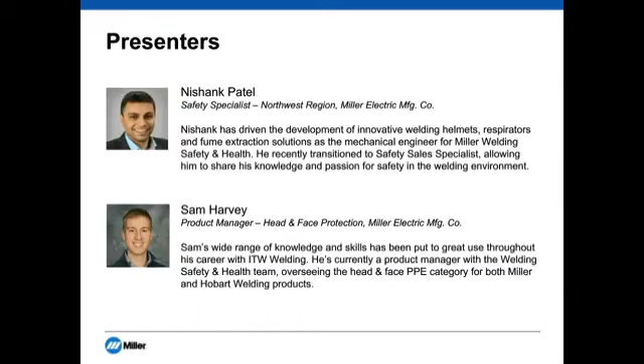Hi everybody, this is Sam Harvey from Miller. Before I get started, I'd like to read our own disclaimer as well. As every welding environment is different and needs to be evaluated by a qualified industrial hygienist to determine the appropriate course of action for fume controls, this presentation is intended for awareness and introductory purposes only and should not be used to replace professional consultation. And then as this group of professionals knows, perhaps more than any other group of professionals, you should read the manuals prior to operating welding equipment in order to fully understand the risk of welding.

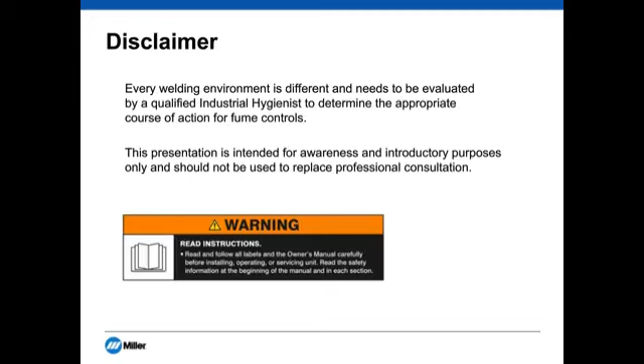With that out of the way, the title of today's presentation is Insight from the Inside. Our goal here is to give you feedback that we've heard from customers that we've visited. As a company, Miller Electric visits quite a few large end users, and what we're trying to do here is give you some of the items that we've learned. Of course we've done third-party research, however, I want to stress that this presentation is not a scientifically researched PowerPoint. It's not based on sample sizes or statistical analysis. We are simply sharing voice of the customer research that we've done, with the hope being that you can use some of the takeaways that we provide in order to enhance your facility, in order to just learn for general knowledge.

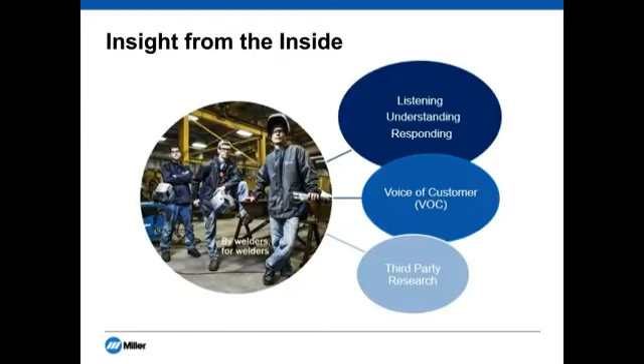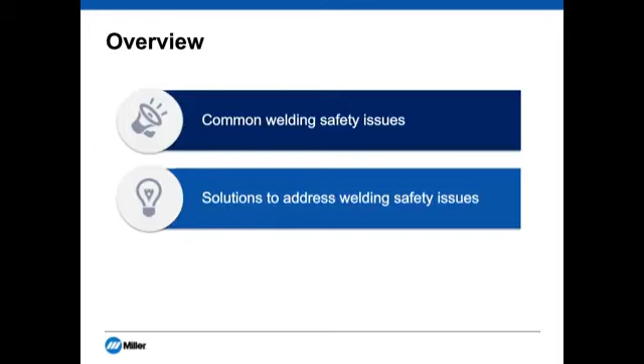So what we're going to go over: we'll start with going over common welding safety issues we've seen and heard, both from safety managers as well as from welding operators. We'll then touch on some of the solutions to address those welding safety issues. Again, in terms of two different things, we'll talk both about tools that you could potentially implement as well as any behavioral changes that we would recommend. Then lastly, we'll leave you with some best practice ideas in order to increase operator acceptance and compliance. Really, these are things that, in order to put those tools or behavioral changes into action, we think give you the best chance of success.

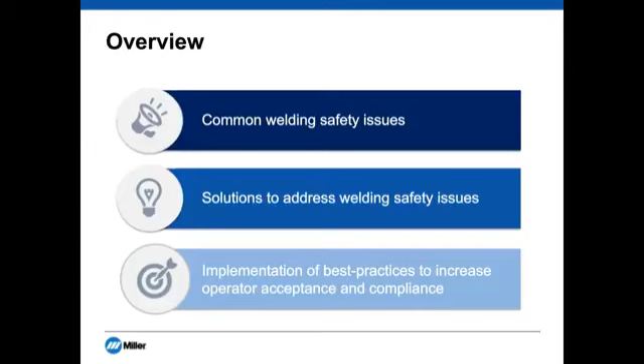So we'll start out with common welding safety issues that are seen by companies like yourself or companies in the welding industry. And when talking about welding safety, it makes sense to start with eye protection. Studies have shown that eye injuries account for roughly 25% of all injury claims by welders, and that 90% of eye injuries could be avoided with proper PPE use. The three eye injuries that we're going to touch on today are welder's flash, debris entering the eye during or after the shift, and then eye strain.

So the main causes that we see from eye injuries are improper helmet settings and use, limited visibility and vision impairments, and then misuse of safety glasses.

In terms of improper helmet settings, really that's about not keeping the helmet down. If you're welding in tight spaces, maybe you don't have the proper lens shade. That's kind of what we're talking about. We'll go into solutions in the later part of the PowerPoint.

From a limited visibility standpoint, we're talking about either using a low quality lens that makes it harder to see the weld, not cleaning your cover lens, not adequate lighting, for example, and then misuse of safety glasses. That one's pretty basic, but it's a big one that goes into debris entering the eye, so we'll touch on some things you can do there.

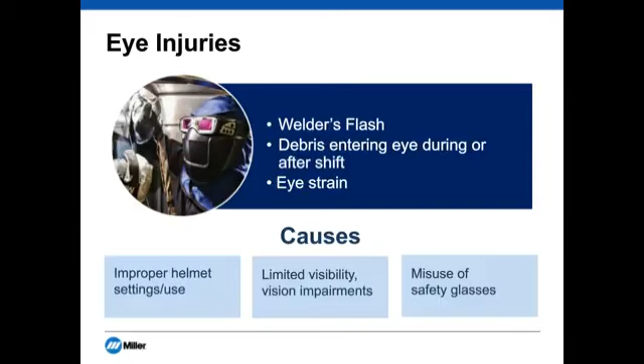Moving off of eyes, another common injury we see has to do with neck strain. This is something we hear a lot about from operators. Maybe it hasn't turned into an OSHA recordable injury, but in terms of ensuring compliance of wearing PPE, obviously comfort plays a really big role in that.

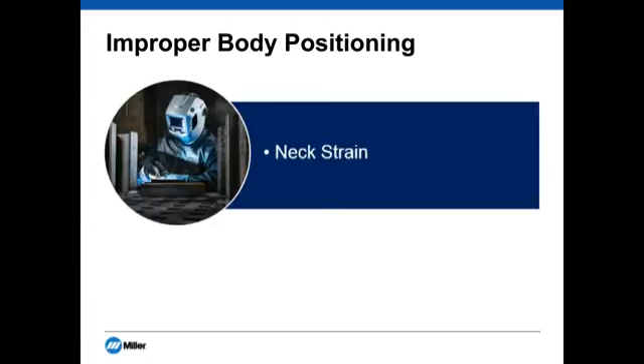Specifically, the causes we see are frequent nodding of welding helmets, limited adoption of welding lens technologies, bulky, oversized welding helmets, and then poor posture and no stretching regimen. We'll break down all these in terms of how to attack those.

So now I'm going to hand it over to Nishank. He's going to introduce some of the issues we see from a fume exposure standpoint.

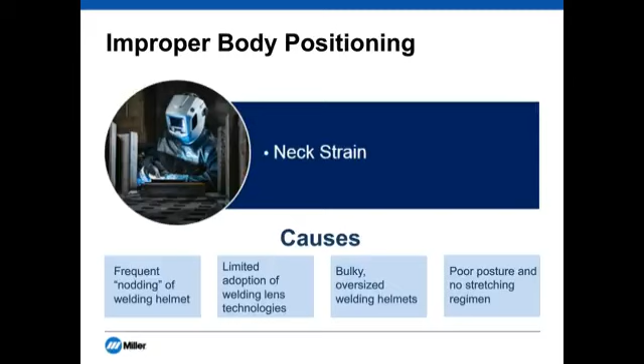So with fume exposure, there's really three things we tend to see a lot of. A lot of customers will find that they have excess fume generation. They'll find that their fume extraction arms are not capturing enough fume. And then they might also be misusing their respiratory protection even though they have some in place.

And there's really three things that cause this. The first one is that welders are using improper weld settings and they're not trained properly. If you don't have the right welding parameters, you could have lots of spatter and fume generation. So that's one of the big things we see, that people are not trained properly, they are not using the right settings.

Next, operators are not adjusting their extraction arms. With fume extraction arms, usually the normal capture distance is roughly 1.5 times the width of the opening of your hood. So it's a pretty narrow window, and let's say you're working on a long weldment, and all of a sudden you're further away from your extraction hood. You really need to keep moving that arm to make sure it's positioned properly so it can capture the fume. Welders sometimes might be lazy and not do that. So that's one thing to keep an eye on.

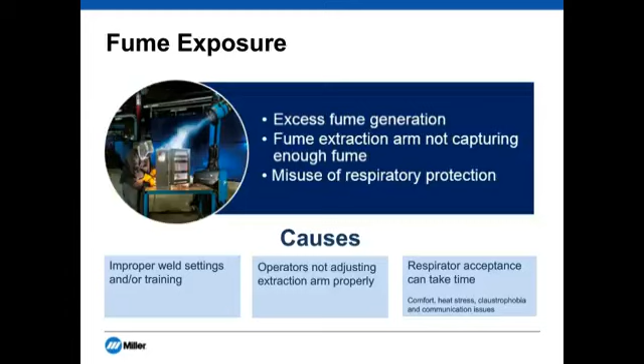So next, I want to cover hand injuries. The most common thing we see with hand injuries are hot wire pokes. And again, there are three things that we tend to see that are causing them.

Number one is improper welding glove selection. Basically, depending on what you're doing, whether it's stick, MIG, or TIG, you always have a trade-off between having the dexterity in the glove and the padding in the glove. So you want to make sure, let's say you're doing stick welding, for example, and especially at higher amperage, you want to move to a heavier duty glove. So that's the first thing we see.

Then we also see, when you're doing really small welds, so you're tack welding or moving really quickly, that's where welders are not paying attention. That's another place where we tend to see a lot of these injuries. And then finally, it's just the torch angle and position and having that set properly. That can make a big difference. So those are three things we see with hand injuries.

And now I'm going to turn it back to Sam to talk about solutions and what we can do to avoid all these injuries we just mentioned.

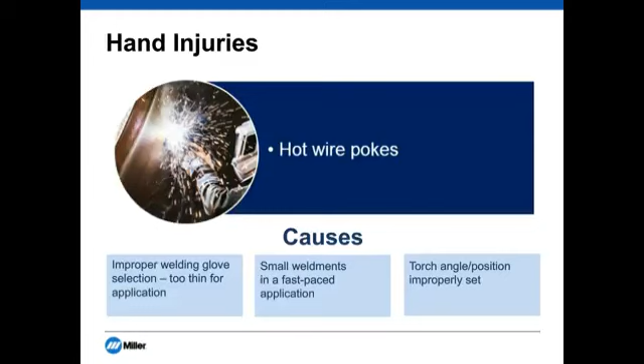So heading into solutions, we'll head back to eye injuries and start with welder's flash. As a lot of you might know, welder's flash occurs when harmful ultraviolet rays are absorbed by the cornea. It can be very painful. It's not usually permanent, but it can be, and mostly it leads to eye swelling and tearing.

From our standpoint, the best way to prevent welder's flash is to keep the hood down. Even if an auto-darkening lens doesn't darken for some reason, the welder is still 100% protected from ultraviolet and infrared rays, so welder's flash does not occur with the hood down.

There's a lot of different ways to try and increase the percentage of time that your welders keep their hoods down. The ones we see the most are comfort. I talked about that earlier in terms of how important it is to purchase products that are comfortable. We see this as a win-win for operators and safety managers in the sense that it's easier to drive adoption, and of course it leads to more compliance.

Another thing we look at in terms of keeping the hood down would be newer lenses on the market that provide greater clarity while welding. Obviously it's important to have increased contrast when you're welding, but in terms of reducing welder's flash, having a lighter light state makes it so you can keep your hood down even when you're not welding.

Outside of keeping the hood down, there's providing tools for unique applications. We've heard too many times of people trying to weld in tight spaces who need to quickly take their hood off and cover their eyes with their arms, or use some other method that isn't compliant, but really it's because they can't fit their helmet in—either welding underneath a chassis or trying to get into a tight confined space. There are now auto darkening tools available so people can weld in tight spaces that fit very close to the face, so we don't really see a reason for not equipping welders with those tools.

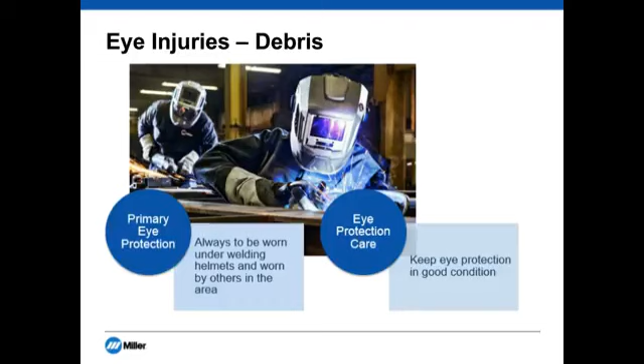So from a strain standpoint, I guess we'll start with the basics again—providing cheater lenses and replacing dirty lenses. Magnifying lenses, or cheater lenses, are available in pretty much all welding helmets—you just buy a little piece of plastic that you can slide in front of the inside cover lens.

Especially for the older generation, those are pretty useful. To reduce the strain of needing to get really close to the weld or trying to focus more than you need to, definitely provide cheater lenses. They're very inexpensive.

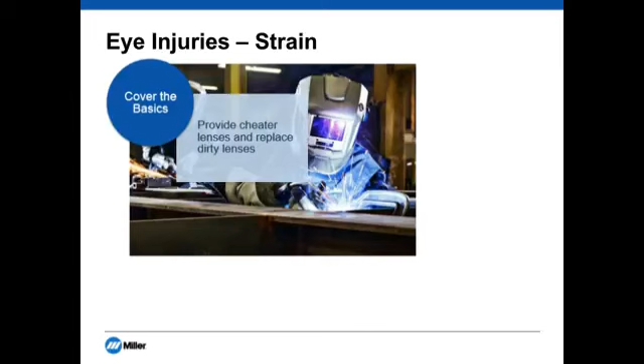Secondly, make sure your welders are selecting the proper lens shade. This is pretty basic, but there are a lot of new welders entering the industry. What Miller recommends is to start at the darkest shade and work your way down until you're able to see the weld puddle comfortably. So don't start at shade 8 or 9, for example—start at shade 13 and then select the right shade so you can see it. You're not overly straining, but your eyes are protected and it's comfortable.

Next, improve clarity. I touched on this a bit, but in terms of buying the latest and greatest, there are quite a few advanced lenses out there that try to make it easier to see the weld puddle. With increased contrast when welding and a lighter light state when not welding, it just makes it easier to see, which leads to reduced eye strain.

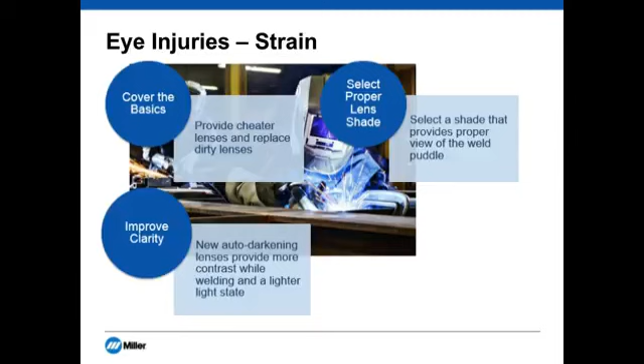And then lastly, staying protected at all times. There are many options out there with integrated grind shields, which allow welders to keep protection on when they're not welding—as opposed to lifting up the full welding helmet and only having safety glasses on underneath. You raise up your auto darkening lens or passive lens, and you have an integrated grind shield underneath, which is a big productivity enhancement but also a great safety tool, because you're fully covered the entire time and can move on to whatever other task, whether grinding or prepping. You're fully protected, and your eye isn't straining through a shade 3 or shade 4 light state.

In terms of improper body positioning and neck straining, the next thing to look at is eliminating nodding. This is again kind of basic, but there's definitely still a lot of passive helmets out in the market, and they certainly play their role. But auto darkening helmets are becoming pretty inexpensive and very reliable, and they really do reduce the need of nodding.

Of course, if you're using a passive lens, you keep your hood up until you're all set up and ready to start welding, then with a jerk of the neck you lower down the helmet. Over time, this can cause neck issues. When you hear of welder's neck, typically it comes from that nodding. So transitioning to an auto darkening hood is, I'd say, a very inexpensive investment to make in a person's long-term health.

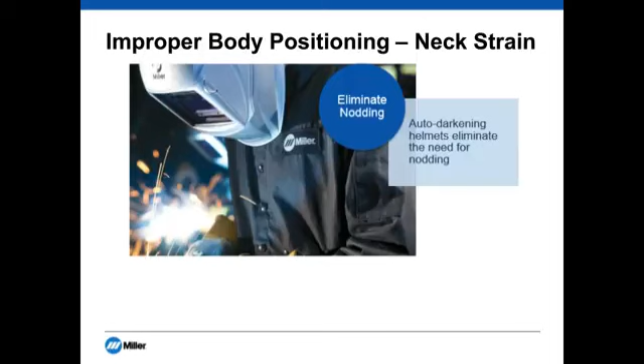Helmet selection—things to think about when choosing a helmet to reduce neck strain. Helmets certainly should be light; people always think about that. The other thing we talk about is balance. There are really two variables that go into neck pain when selecting a helmet: weight and balance. You can think about balance as, do you want more weight hanging off the front of your face, or would you rather have it on top of your head? Those are very drastic examples, but it gives you an idea from a neck pain and torque standpoint—on the back of your neck, it's reduced when the weight of the helmet is shifted towards the back. So looking at both weight and balance is a key component towards neck strain over the long term.

And it's amplified when using hard hats. You have to fit the hard hat underneath your shield, so the weight of the welding helmet is pitched up and pitched forward, making that torque equation even more important. We do see more neck issues when it comes to hard hats combined with welding helmets.

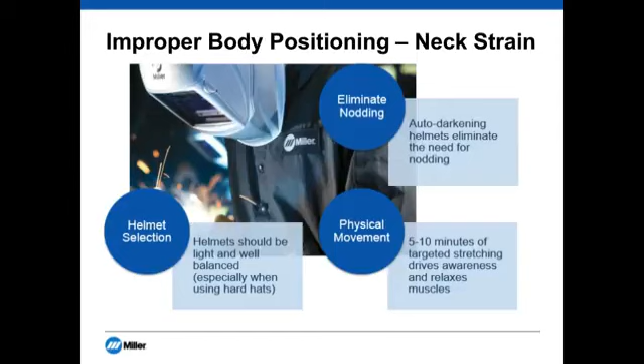Lastly, physical movement. A lot of times you have to do out-of-position welding, or even if not, you might be staying in a good posture position. However, you're in a pretty consistent position throughout the day, and that puts a lot of strain on muscles over time. So a basic thing a company can do is implement a 5 to 10 minute stretching program, whether that's at the beginning of the shift. At Miller, we do it during a break in the middle of the day. It could be both, depending on if you're doing a lot of out-of-position welding or anything that really strains the neck muscle. Those things can go a long way towards building those muscles and releasing some of the strain.

Another thing to think about would be job rotation. That's something we try to do at Miller Electric when it comes to assembly. It's something other companies should be implementing as well when possible. If you have certain welds at one position potentially straining certain muscles, and you rotate that person after a couple of hours to a different piece of work at a different position using different muscles, it really helps reduce fatigue overall.

And then lastly—oh sorry, yes, the last one would have to do with work hardening programs. Thinking about new employees entering the workforce, it's well documented that welding has an older workforce, and there's going to be quite the influx of young people. A lot of times we see people getting injured in the first year or two on the job, and it's not hard to imagine why. If they're not used to standing for 8, 10, or 12 hours a day, they're probably not used to being in a certain position. So when it comes to back, neck, and different types of strains, work hardening programs—while not necessarily easy to implement because of the culture, or people who've been there a long time wondering why new people are working less—can pay dividends in reducing the amount of issues new employees have when they start a job.

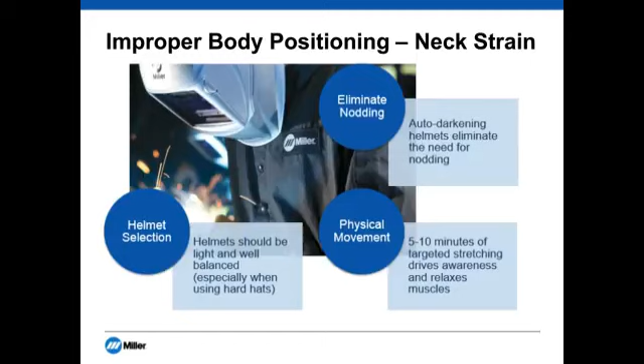The first question is: which of the below scenarios do you or your business struggle with when welding? Choose all that apply. You can see the 7 different responses there—I'll read through them quick, feel free to respond while I'm reading. We'll give about a minute. The first has to do with fogging or condensation in the helmet. The next is welding in tight spaces. The third is collecting welder productivity data. The fourth is welder training or onboarding. Fifth is not enough ambient lighting in the work cell. The 6th is fume management. And maybe you are awesome—probably you are, but even if so, you might have some of these struggles. The last option is if you don't have any of the struggles listed. Please choose all that apply, and I'll give another 20 or 30 seconds before moving on to the results.

Okay, hopefully that gave everybody enough time.

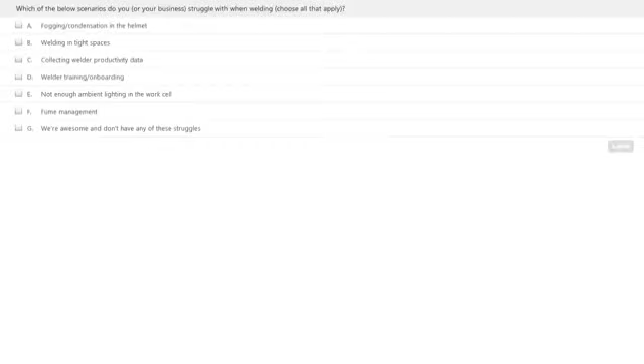So fume management is the winner, along with welder training and onboarding. Welding in tight spaces follows close behind. It's worth noting that 8.7% of you are awesome and don't have any of these struggles. I put one of those for myself too, just to make sure it wasn't left all alone, but I don't think I was the only one. Congratulations to those who chose item G, and for the rest of you, we appreciate that feedback.

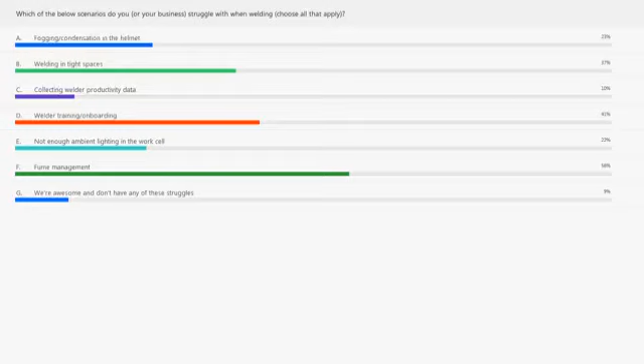Thank you, Sam. So the number one thing you can do with fume exposure and how you can combat that is proper training, right? And with proper training, what does that mean?

Really, it means that there's really three things that you can focus on. You really have to take a look at your process and the parameters you're using.

For example, let's say you're doing stick welding. Stick welding is always going to generate more fume than a cleaner process such as MIG welding, and MIG welding is always going to generate more fume than TIG welding. Again, I said always, but generally that's what we tend to see. So depending on what process you're using, if you can change to a cleaner process, that's definitely something you can do to help reduce the amount of fume you're generating.

Another thing is the transfer type. So when you're welding, whether using short circuit or spray, there's technology out there called pulse welding. What pulse welding does is dial in the exact amount, basically giving you the right amount of heat you need, so you don't produce excess spatter or fume. If you address the welding process itself, you can really dial down on the amount of fume and spatter used.

So there's a lot of power sources out there, a lot of different kinds of wires, different alloys that they're made with. Take a look at that and make sure that if you can switch, if that's something you're able to do, that will definitely make a huge difference in changing the amount of fume you generate.

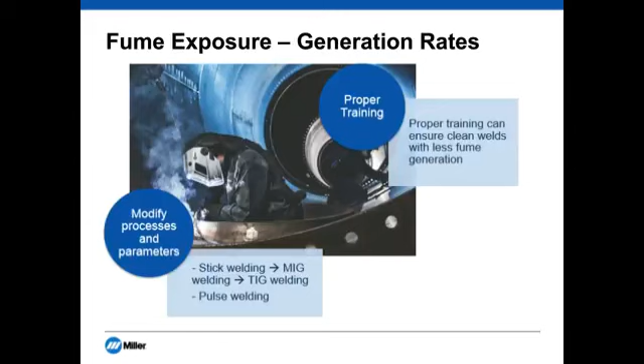Besides training and modifying the process, it's also the materials you're welding on. A lot of environments are very dirty, with a lot of dirt and grinding involved. So it's very important to clean your workpiece and make sure your base materials are clean.

The wires you're using, there are a lot of wires out there that are low fume wires, and not only low fume, but certain alloys, for example manganese, beryllium, hexavalent chromium - these are all chemicals that are hazardous. So there are wires with low concentration of those hazardous substances that you can use. You can also add more argon shielding gas to add stability to your weld. So those are some things you can do to really target the fume generation itself to reduce your exposure.

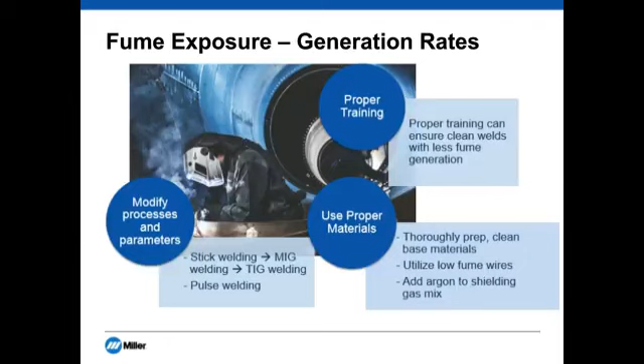Next, we'll take a look at the arm. As I mentioned earlier, there are extraction arms out there, but they only capture 1.5 times the diameter of the hood. So most of us, imagine if you were working on a long weld, it'd be pretty easy to forget to move that arm. I would be struggling every time I had to go somewhere - I'd have to always move the arm with me. That would be a very repetitive and painful process.

So you can make sure that you train your welders to always position the hood an appropriate distance from the weld, and make sure - I know this sounds silly - that the hood is facing your weld, and that it's actually pulling the fumes away from the welder. A lot of times you'll see all kinds of issues with that. So it sounds really simple, but that's what it is - making sure you train your welders to move that arm.

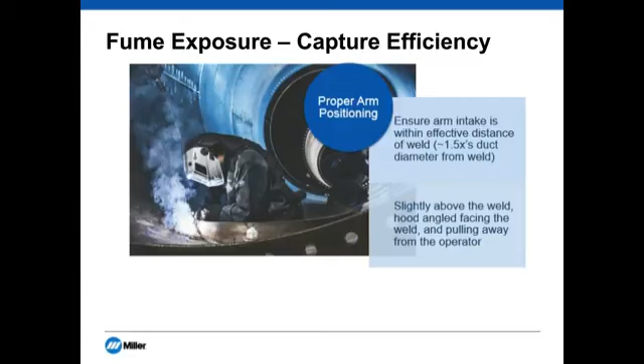There are also solutions out there that we call advanced airflow solutions. Miller has a technology called the Capture 5 system, and instead of the standard 1.5 diameter, which translates to about 12 to 18 inches of capture distance, you can get up to 5 feet of capture distance. So if you think about the problem where welders aren't moving the arm or putting it in the right position, well, if you increase the capture distance, you don't have to constantly adjust your extraction arm. So keep an eye out for technologies like that, and if you can implement something like that in your facility, it makes it a lot easier on your welders and helps with productivity.

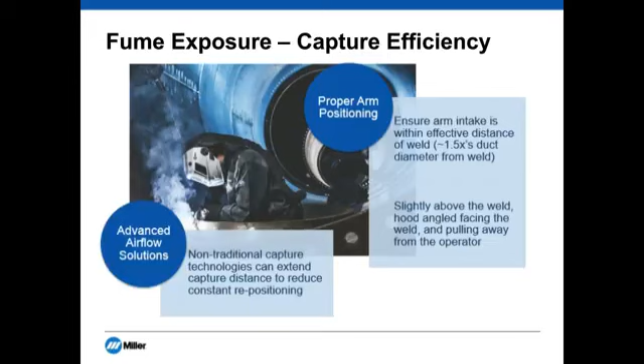The final thing I want to cover on fume exposure is respirator misuse, and we see a lot of this out there. People don't like something about their respirator and they'll modify it, or use parts from one manufacturer with another manufacturer, and that's a big issue because these systems are all tested as a system. Anytime you modify them, you could be reducing your protection, because they're not intended to be used in that configuration. So always try to use your safety equipment or respirators in the original configuration, or if there's an approved accessory or configuration, only then can you use it.

The other thing we see with respirators is making sure you're using the right respirator. There's different hazards and different exposure ranges. For example, if you're dealing with vapors, gases versus fume particles, make sure you have the correct type of filter that is rated appropriately for your hazard. And depending on your exposure level, there are different levels of protection that different respirators provide.

For example, you can start all the way on the bottom with a disposable dust respirator. You can move up, and then you can go all the way up to PAPR or supplied air systems, and all of these solutions will have an assigned protection factor. You need to make sure that the assigned protection factor you're using matches up with your exposure levels.

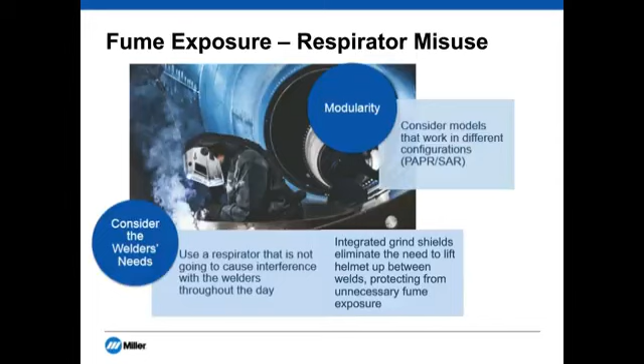It takes time, especially with these respirators. So try to do things like, if your welders constantly had to switch between a grinding helmet and a welding helmet, there are integrated grind-weld helmets out there that can really take away the discomfort, all the monotony of constantly doing different things that interrupt your productivity. That can really increase that welder acceptance rate, because if your welder's not happy with it, he's not going to be using it, or the chances are he might not be using it properly. So I hope that covers a little bit about the respirator.

Before we move forward into talking about hand injuries, I want to do a quick poll question, and I think this is the last one. The question is, which of the below reasons lead your operators to not using their respirators correctly? Option 1 is obviously discomfort. Option 2, welders don't feel the respirators are needed. Option 3 is interference with productivity. Option D is they do not work well with your other PPE - for example, you could be wearing a helmet with earplugs, safety glasses, things like that. E, if you've got amazing welders and you have no issues, then none of the above. And F, if you don't use respirators, then you choose that solution. I'll give you guys a minute to answer, and then we'll take a look at the poll results.

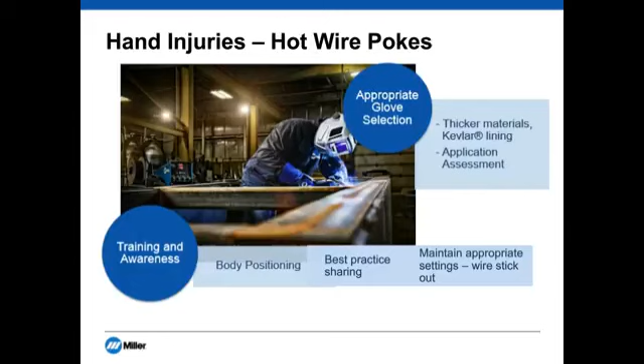So what I want to do now is turn it back over to Sam to talk about how we implement these solutions.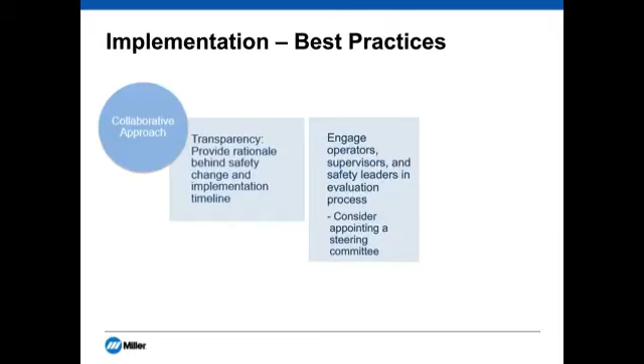It's a pretty small chance that you're going to get a change 100% right away. So have channels that are open so that people can give feedback, and then most importantly, either act on the feedback you get in terms of what's not going well, or at the very least give a response: this is why we're going to continue down the path we've taken, or this is why we're not going to make that investment. Don't just leave those comments in the shop floor box unanswered. Otherwise, that's how you lose the empowerment. In order to have that empowerment and adoption, it's really important to give feedback to people once they try and give you theirs.

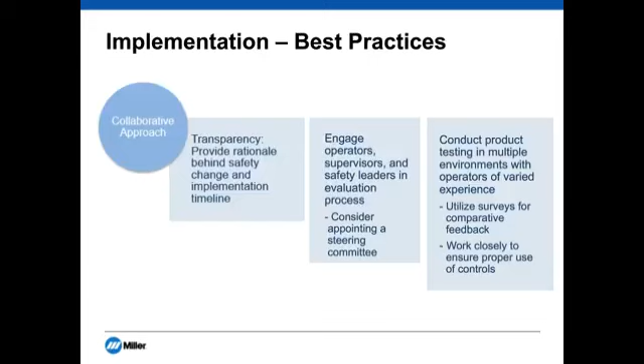So the first one I just went over was being collaborative. Secondarily, think about productivity implications. Whenever you're making a change on the shop floor or wherever you are, you're doing something different. It's going to take a little bit of time. There might be a learning curve. Again, from an operator acceptance standpoint, it might not be there right away.

One thing I'd say based on our experience: to increase the chance of operator acceptance, try to have it not impact productivity, but that doesn't always work. So that's another thing to be upfront about. If you expect productivity to go down a little bit as people get used to something, be encouraging about it. Perhaps you need to get with your operations team to make changes, whether from an overtime standpoint or a staffing standpoint.

You want to be supportive and give yourself the best chance. If people see that their productivity is being impacted because you told them to do this new thing, and now they're not able to do their job as quickly as they're used to, they're going to become cynical pretty quickly. So if you expect productivity to be impacted negatively, be prepared to counteract that. Hopefully when you're doing some of these investments or changes, productivity might be positively impacted, in which case that'll help drive operator acceptance.

That's something that you should help celebrate to reinforce the changes. So next, be patient and confident that long-term results will come even if there's a learning curve. Potentially if the scope is large in terms of the change, you might need to adjust production for a short period of time, or otherwise change your operations so that you're more successful.

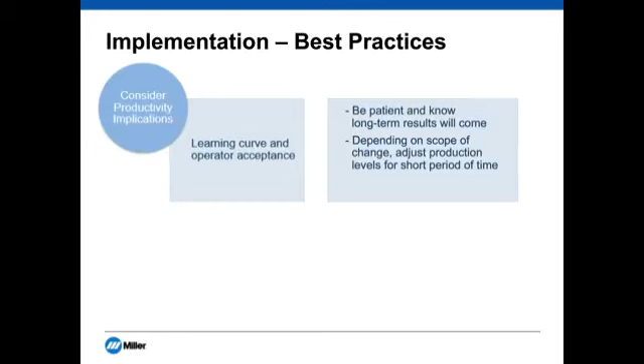So consult with like companies. Doing stuff like this is really good, of course, because you're learning from other companies. But perhaps more specifically in your field, if somebody's good at safety, I hope that they're willing to share. This isn't quite like a productivity thing or a unique process. Everybody wants their employees to go home in the same state that they came to work. That's our top goal here at Miller Electric. And if there's things that we can do to help our fellow companies in the welding industry, we'd be happy to help from a safety standpoint. But we do encourage others to reach out and see what best practices they can take from other companies instead of reinventing the wheel.

And I'll hand it back to Nishek one last time for him to take us home.

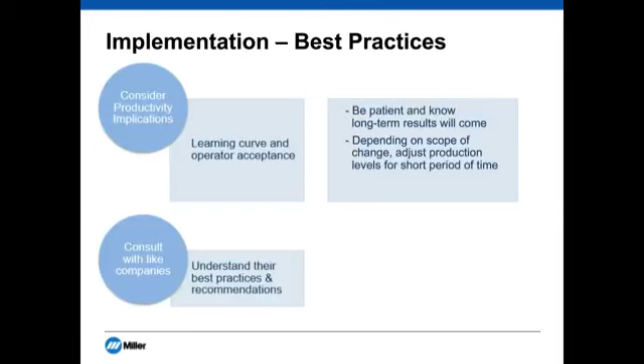So we talked a lot about problems, solutions, how do you implement it. What I kind of want to touch up, what I want to end with, is what can you do? How do you go about identifying the problem and solving it? What does that process look like?

So normally, you start by analyzing your work environment, right? Try to see what kind of hazards you have and identify them. Then you want to document those, right? You want to write down, hey, these are the kind of issues I've been having, collect them, and then finally you want to engage a QSSP certified safety specialist. I say QSSP because that's the kind of training a lot of safety specialists go through to really identify what kind of hazards you're dealing with, right?

And when you do all that work ahead of time before engaging that safety specialist, where you know what your issues are and you're documenting them, then you can really leverage the knowledge of that safety specialist to have them tell you and work with you on finding the right solution, right? Because they don't know your work environment. You know your work environment better than they do. So the more prepared you are going into it, the more you'll get out of it.

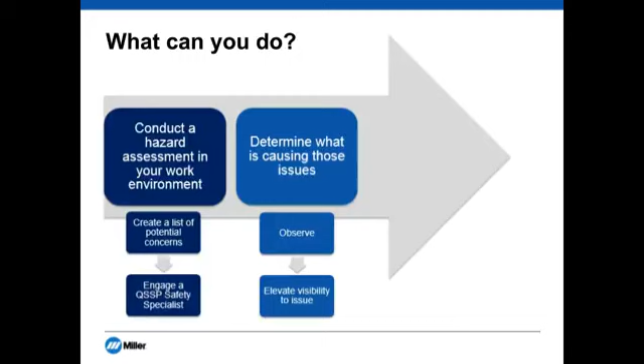Well, the problem in the first place was moving that extraction arm properly, right? So could you look at different technologies where you don't have to move that arm as much? So it's really important to identify, have your hypothesis on what the issue is, but then also observe and make sure you confirm it. And then the final step is committing to safety, right?

Is working with a safety specialist. You identify what the right solution is, and then you really work with them to implement that solution. And you get participation from all your employees.

You educate. We touched on training and why it is so important to train your welders. We did that poll question where the number one thing, the problem was that welders didn't think they needed to use the respirator, right? So it's getting that participation and engagement from them, and then it's developing an action plan.

So for example, when you do respiratory protection, you will need to do a written respiratory program, right? You'll need to put in writing what different kinds of things you're going to be doing. It's not just buying this respirator and that's going to make all my problems go away. It doesn't work like that. You've got to do training, you've got to make sure you maintain the equipment, and all those kind of things.

So I know this process can be scary and confusing, but it's really simple, right? Try to understand what your issue is, make sure you validate that is your issue, and then you pick a solution that meets the specific needs of your environment, and then you make a plan around it where you're getting engagement from your employees.